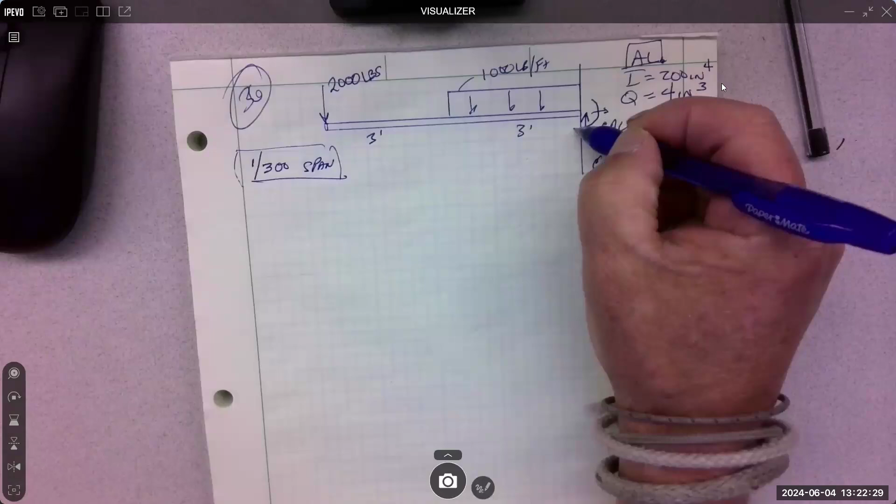And this is fixed, so it gets a Y, X, and a moment. So I'll call it moment A. We'll call this AX, and we'll call this AY. So we need a Y. We can sum forces at Y.

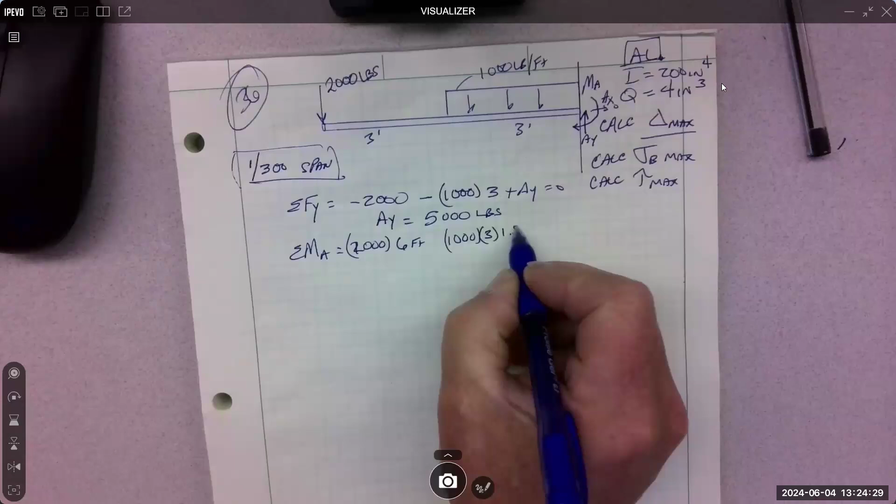2,000 times 6 feet, and that is positive. 1,000 times 3 times 1.5 - the 1,000 times 3 concentrates it halfway, 1.5. That's also plus.

And then this is going the other way, right? It's negative moment at A, and that's equal to 0. So that's how you write it with a fixed support. You label your moment, whatever you label it, and you assume the direction, and if everything comes out positive, then you're good. The direction's good, and you can calculate MA.

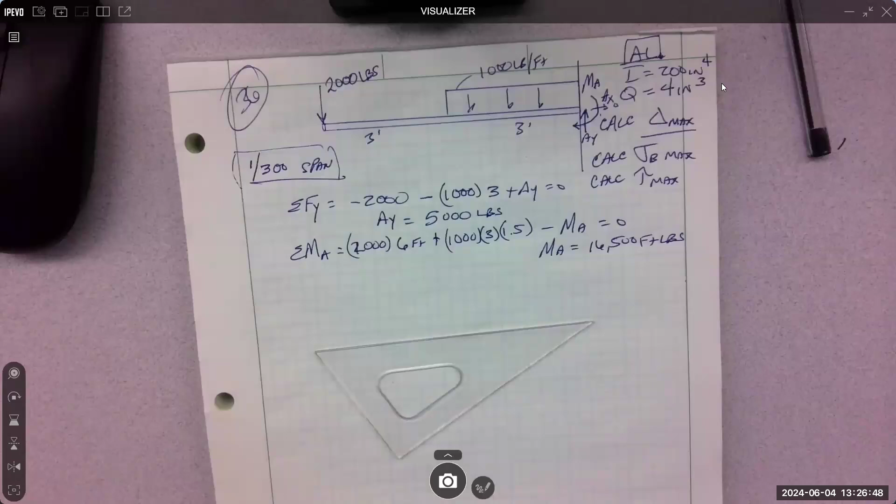Good, next Tuesday? Tuesday at 1 o'clock. If that doesn't work, let me know, because I am not following the final schedule. Don't turn me in, but the final schedule has us doing it on Thursday at 1. Would it be possible for me to take it online? You can take it at a different time if that doesn't work. So I think one might go early. I'm here at 9 on Tuesday, so you could do it at 9, or a different day. You just gotta let me know. I'll send you a message. All right, yep, yeah, no problem.

Shear diagram, you do it. You probably have it done. Rock stars.

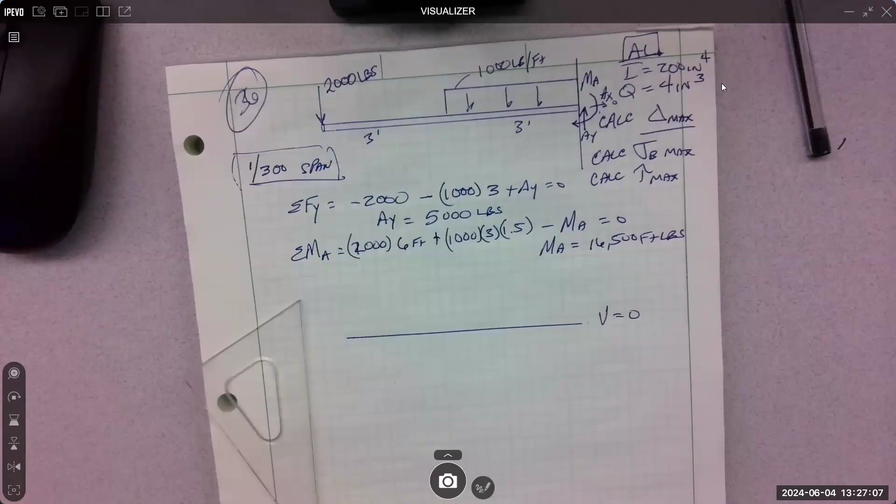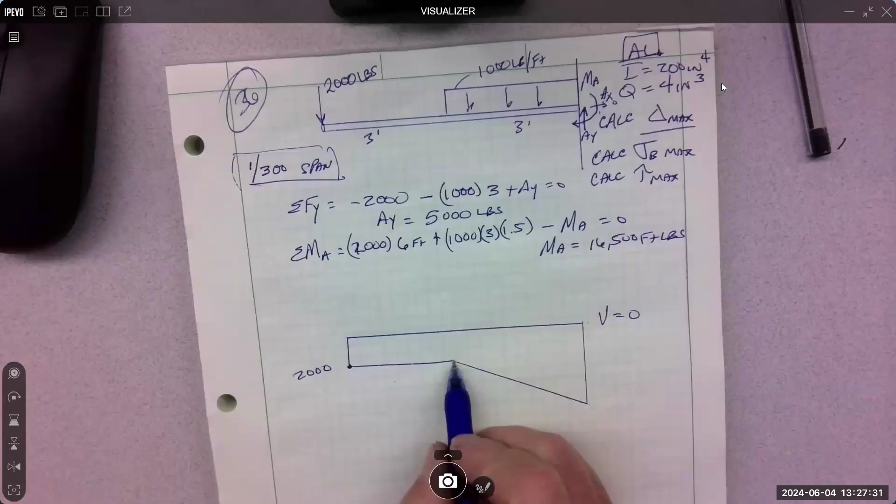It comes down, nothing happens, so it goes straight across, and then it comes down, then it goes up. This should be 2,000, and then it drops a total of 3,000 to 5,000, and then it returns. Vmax is 5,000.

Then I'm going to superimpose the moment diagram on top of the shear diagram. So it's just so fun to do that.

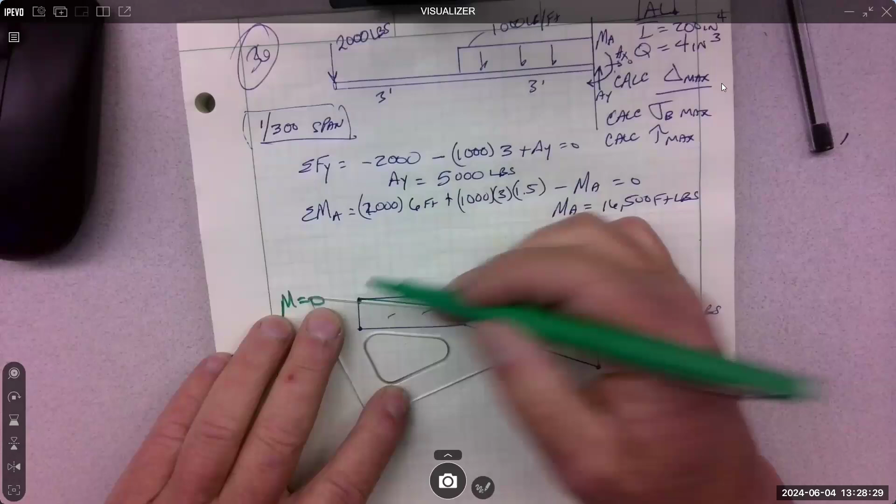So then the green equals M equals 0, and it is 0 out here, right? The shear diagram is negative, negative, negative, and then it gets more negative. So it's going to start at a slope. I'm going to keep it pretty flat to here.

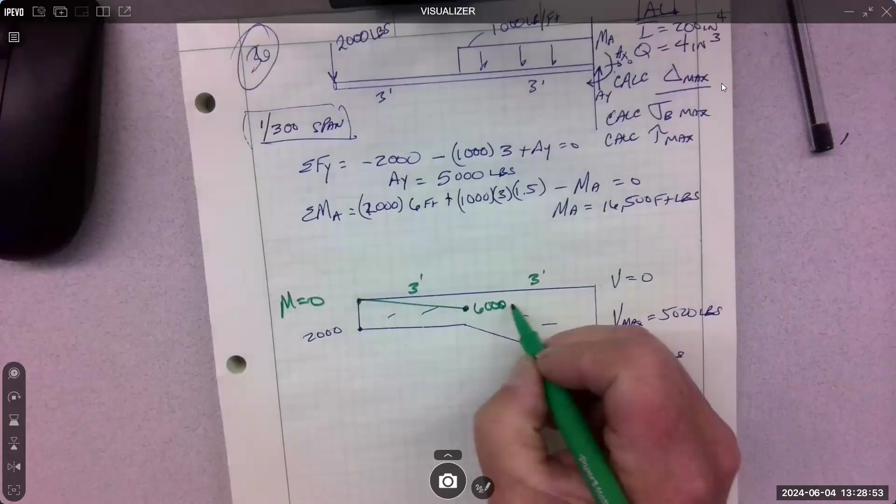And what's the moment at this location equal to? Careful. Yeah, it's just this rectangle right here, 2,000 times 3, so that is 6,000 foot-pounds. So I'm just superimposing the moment diagram on top of the shear diagram.

Then it goes more negative slope, and then it's continuously getting bigger and bigger negative. So it's coming out of here like that, and then it's getting steeper and steeper and steeper. So it is parabolic down to there.

And we know if we're confident in our moment calculation up here, that it should be 16.5, because that's the moment at this location. We're at the same location.

Sorry to interrupt, the question again - exams open up, right? Open note, open book. Thank you. Yep.

I think put an extra 0. You think what? They put an extra 0, oh I think. And then yeah, it's 2, I have a whole bunch of zeros there. Here, I'll put a decimal point in there. It's like money.

16,500 foot-pounds, good? Clearly the maximum moment. All cantilevers have - this is a cantilever, no support out here - all cantilevers have maximum moment right here. So all cantilevers, unless you have some kind of up force, they're all going to deflect like this, and that is a frowny face. So that is a negative moment. It's all down here negative, right? So there's a bunch of things that help you out with cantilevers. I guess you could have an up load and it could deflect up, but that's pretty weird, pretty rare.

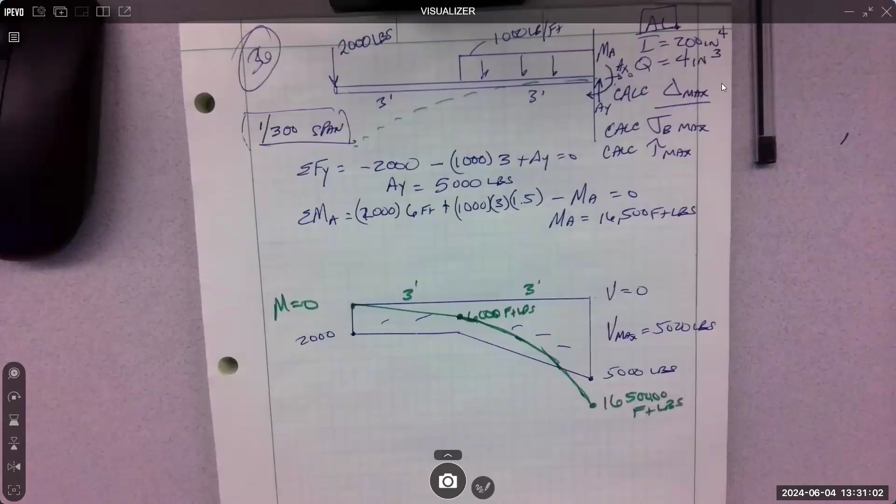All right, so now we can go for shear stress max, which is VQ over IB. And we don't know B because we don't know the shape.

So I actually just kind of threw this whole shear stress thing in. So we'll say that this thing is like some kind of a W shape, right? And here's the neutral axis, and B is the width at the neutral axis, and we'll say that that is 0.6 inches. So that's what B is. It's the width at the neutral axis, because shear stress is maximized at the neutral axis. Bending stress is maximized at the outermost fiber.

Okay, and we'll say our C value is 7 inches. We'll need that too. So I just kind of made this up. We have Q, we have I.

Yeah, I had some difficulties doing the homework from last week, trying to find the Y bar. So we were supposed to add area 1, area 2, right? The area 1 on top is the same as the box, so you just add them up.

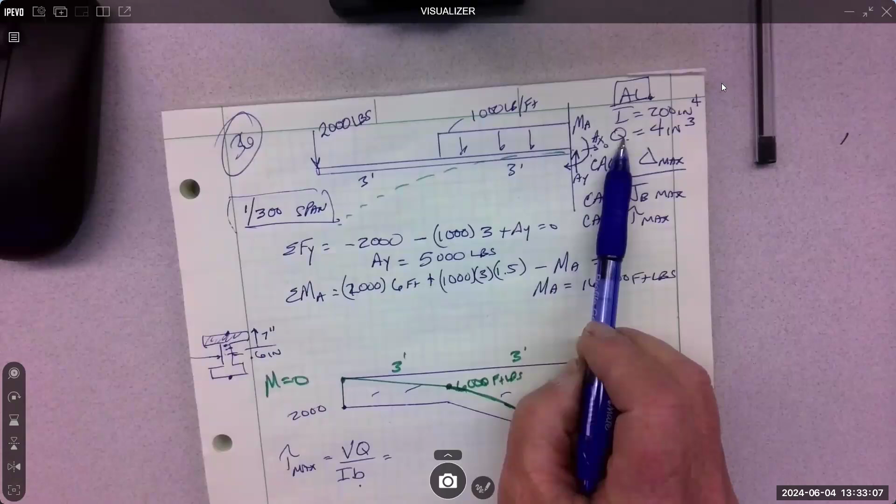So did you find the Q? The Q is given. Like in the book, or you just get it? I just made this up, yeah. Okay, and that'll happen on the final too, you're just gonna make it up. To save time, I will give you Q.

So you don't have to calculate it, right? And to save time, they've given us I. That's how I can shorten problems, by giving you all the properties, not making you look them up or calculate them. So look for that, like hey, if they're gonna give it to you, just use it, don't recalculate it. If they're gonna give you I, don't go looking it up or calculate it. If they're gonna give you Q for the shape, they're just helping you.

Alright. Maximum shear is 5,000 pounds. Q is given at 4 inches cubed. I is given at 200 inches to the 4th. And the base dimension at the neutral axis was given as 0.6.

Like, the problem can give you a lot of stuff, especially on the final. You could have the thermal coefficient of expansion for the material. You could have Poisson's ratio for the material. All these things we've dealt with in the past could show up on that problem. That doesn't mean you have to use it. Don't use it if you don't need it. Just use what you need.

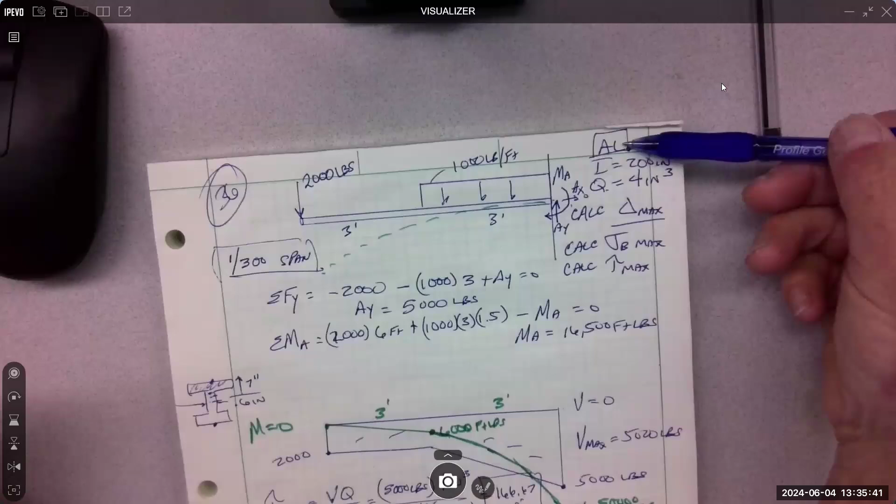And what does aluminum think of that? So you'll probably also be given the limits if there's not any in the back of the book. I don't think aluminum has any shear stress limits in the back. It doesn't, so it just has ultimate. Does it have it for aluminum? Yeah, 27 for 6061. 27,000, yeah, 27 KSI or 27,000 PSI.

That's pretty big. How much do we have? 166. So do we have a shear problem? No, we are factors of safety to the good.

Did you say do bending first on the video? Yep, bending typically you do first. Check it in shear, but you're gonna do both, so I just did this one first. If you gotta do them both, doesn't matter what order. Okay. All right, so bending is what?

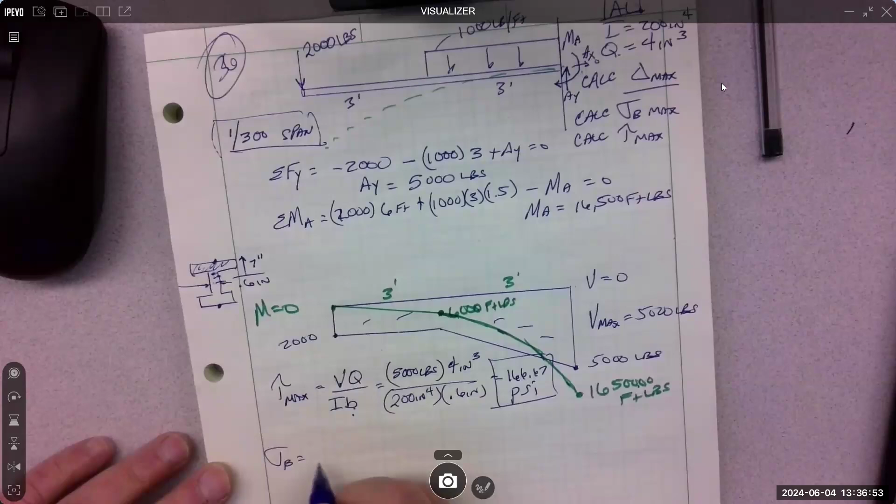Let me see. MC over I. Or M over SX if we had SX. Some of you used that. That was good, but we don't have SX. We have I, so we'll use MC over I.

What's our moment? 16,500. And that is what? Foot pounds. So again, keep track of your units. This is where the opportunity is to mess up. What's our C value? I gave it to you as 7 inches.

You get that from the shape, the C value. And then we're given I at 200 inches to the 4th. Bending stress needs to be in PSI, pounds per square inch, or KSI, kips per square inch, either one. We have pounds, but we have a foot mixed in, so that's got to go away. 12 inches per foot. Almost always the case that we have to add this to get our units to work.

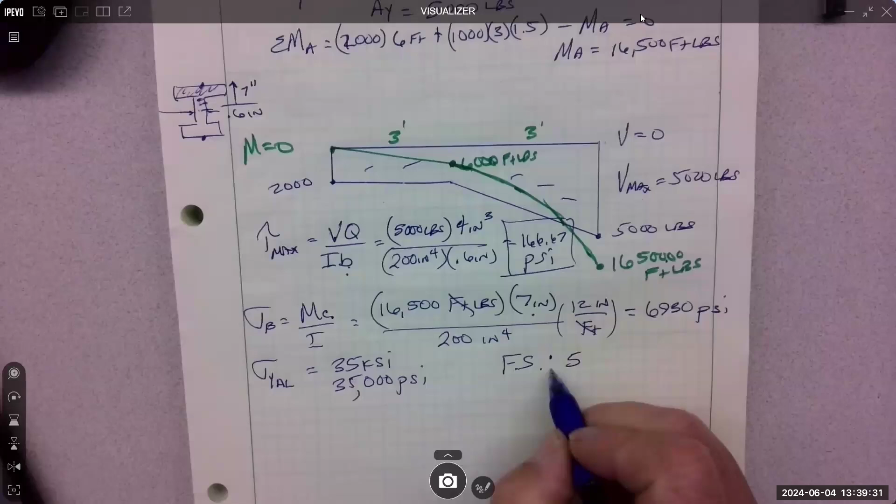All right, so everything's good. We're within stress limits, everything checks out. Now we can do deflection.

So we are doing deflection by the formula method, not the area moment method. The area moment method is pretty complicated, it's really not necessary for us to grind through. The more common method is the formula method.

There are a few in the back of the book, not all of them. You can get more of these beam diagrams online, just be careful of your source. These are called beam diagrams and formulas.

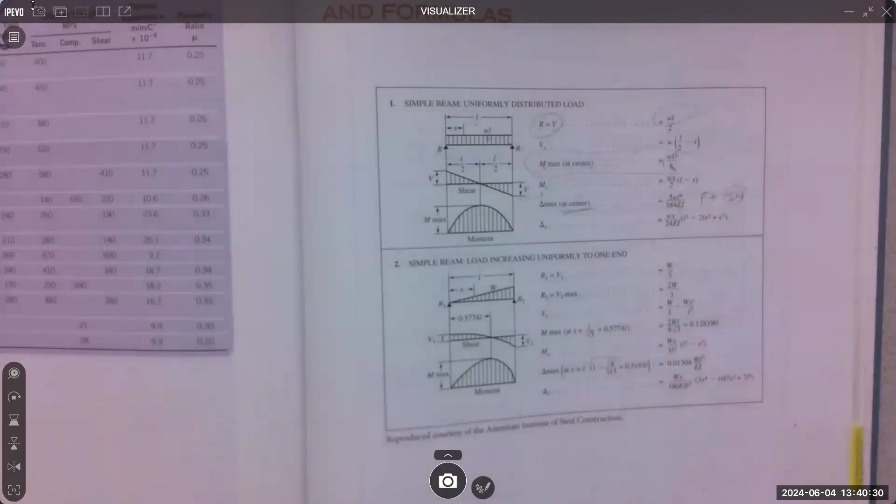In the back of the book, there are beams that are given that are super common, like we do them over and over. So they generate formulas for you. They're super handy, and you get a bunch of information from this.

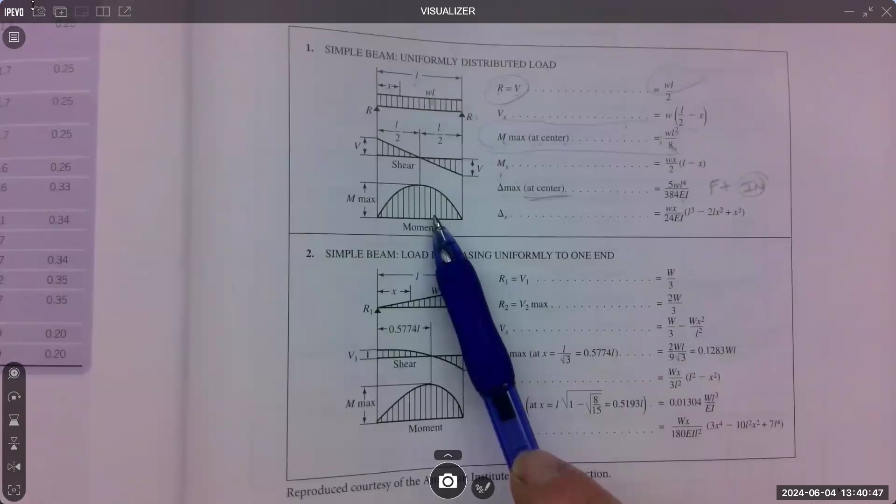You can get shear and moment diagrams. You can get maximum moment by formula. You can get moment at any X location on the beam by formula. You can get deflection, you can get deflection max. That's what that triangle is, deflection.

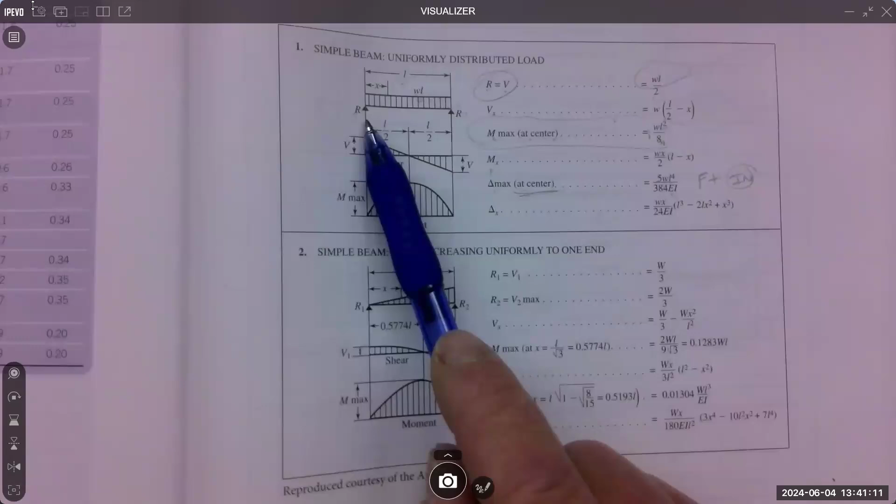This is saying that it happens to be at the center for this very simple beam. A simple beam is reaction at both ends and then a distribution, a uniform distribution. So the key is your beam has to perfectly match these beams, it cannot be any different.

So if you have a uniform load on a simple span where the supports are at the end, that's a match right there. If you have a non-uniform load, simple span where the supports are at the end, that's a match. You can also get deflection at any location X.

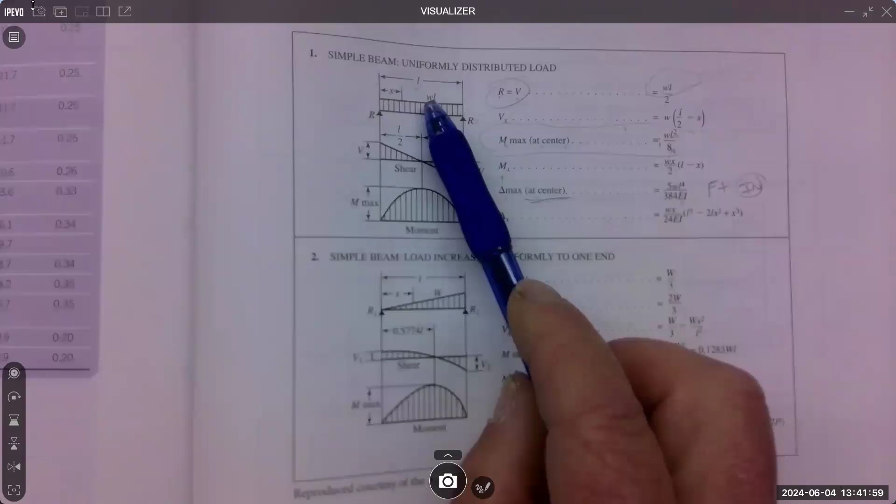Any location X, these get pretty gnarly, these equations. So W is the distribution, L is the span, so you can see L is there. You gotta look at the diagram to see what they're calling L, what they're calling X, what they're calling W.

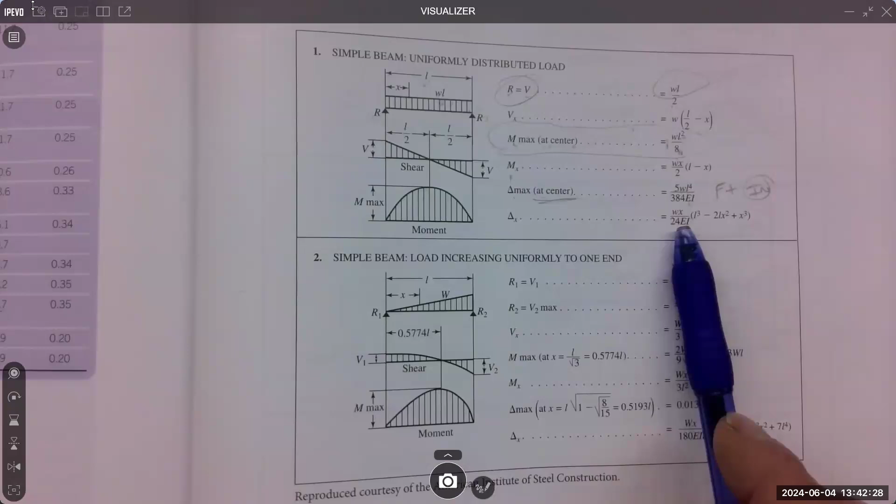And then also you're gonna need the inertia of the shape. So if it's a rectangle, you gotta know the inertia, calculate it, and you gotta know what the material is, E, modulus of elasticity. So all those things typically are given in an analysis problem where you're given everything. You're given the beam, you're given the load, you're given the conditions, and you're asked, is it good? Is it safe?

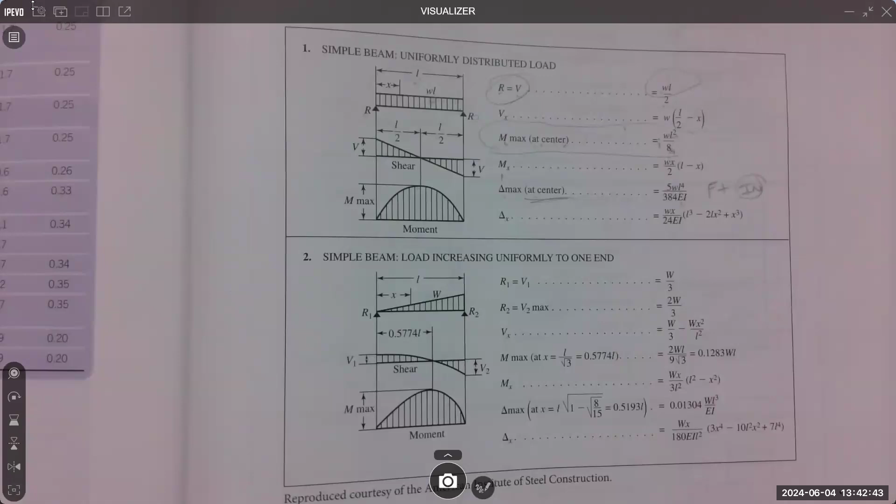So our job is to match up what we have to a beam in the back of the book if we want to use the formula method. If you can't match it up, then you can't use the formula method. Now, there is a concept called superposition.

That means if you can match up the beam to the back of the book with one of the loads, and you can match up the beam with the back of the book with a different load, and their deflection is maximized at the same location, you can use both of them and add them together.

I don't know if that made sense, but there is a cantilever with a single load at the end. Which one is it? 14? I agree, cantilever. So we can match the beam.

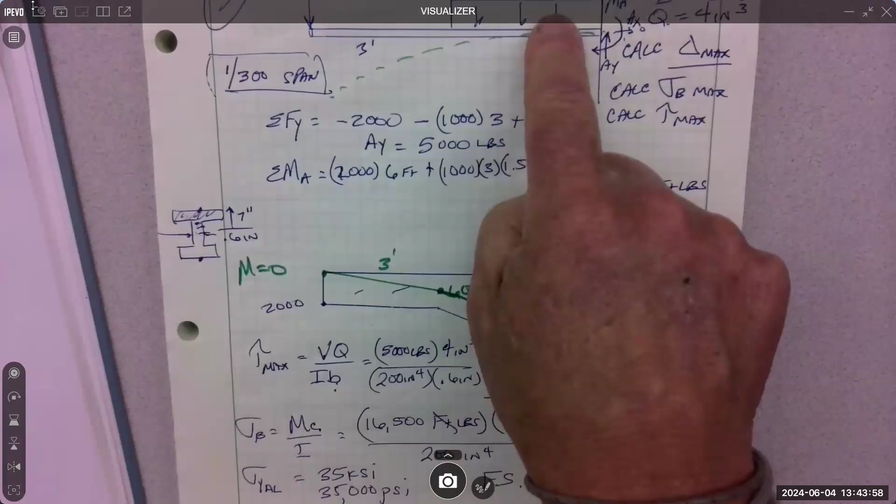We can match the beam and the load. So the beam is the same and the load, so we have a formula for this condition. Now, is there one with a partial distribution on a cantilever?

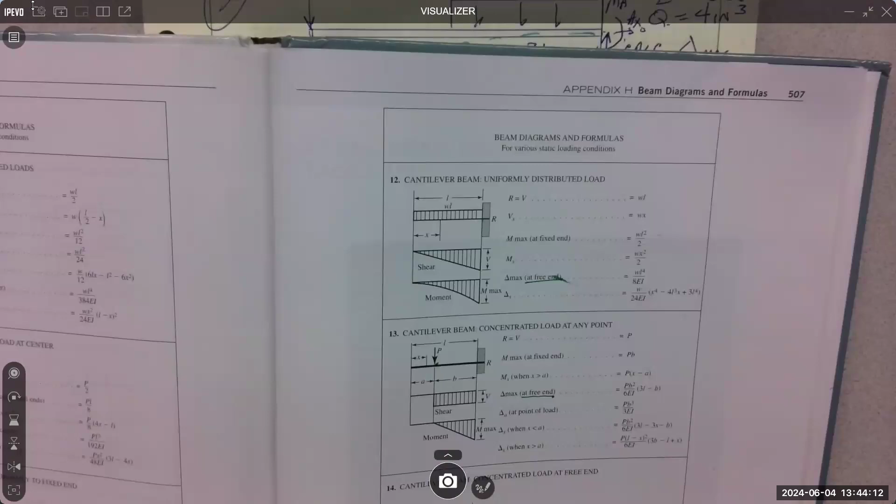12 is a full distribution, so 12 doesn't work. There is none. There is no cantilever with a partial distribution, but there is a cantilever with a concentration.

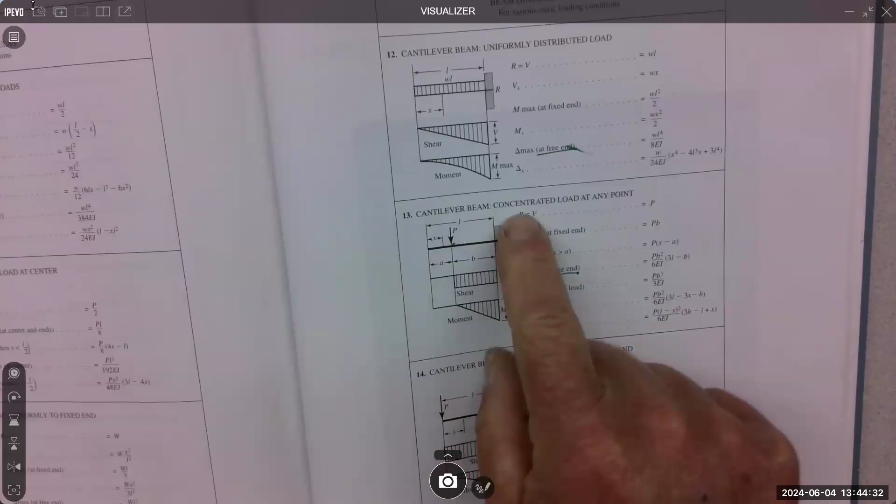Yeah, we can concentrate the distribution. Exactly, so cantilever beam concentrated load at any point. We're going to have a concentrated load at 3 feet, because we can take this distribution and concentrate it.

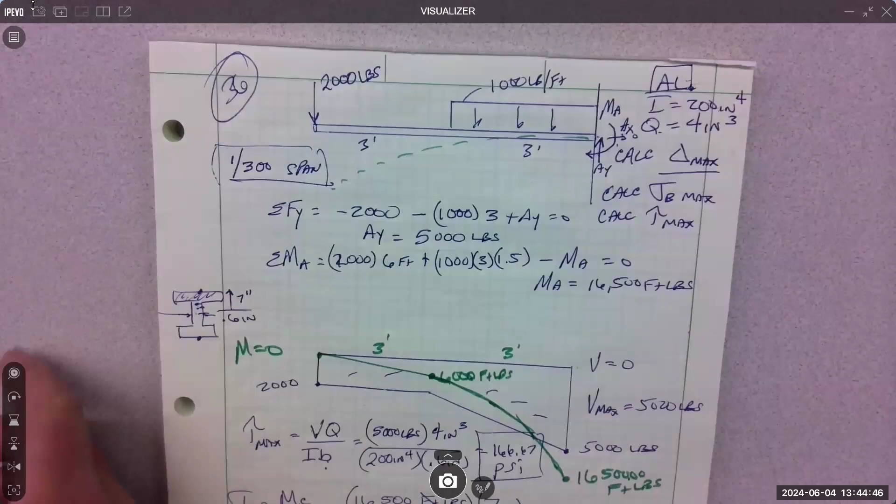Both of those deflections, so this deflection is max at the fixed end. Oh, that's the moment. At the free end, deflection maxed at the free end. Deflection maxed at the free end.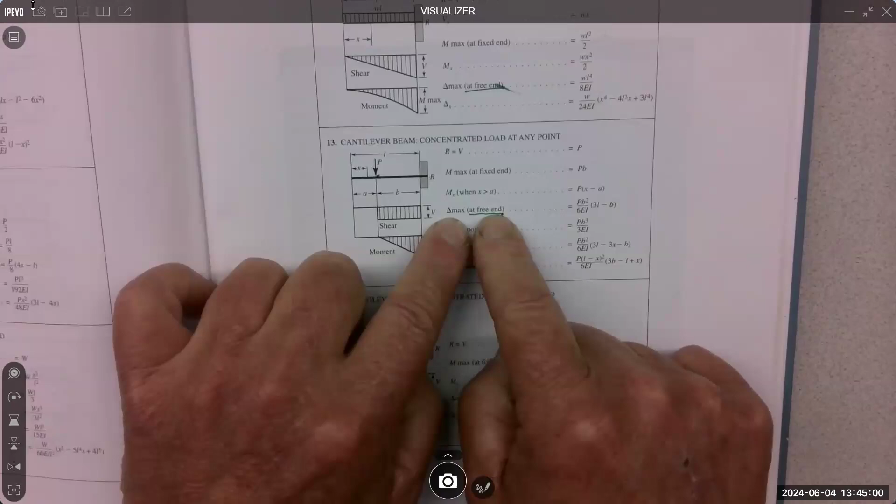That's also got to be true to use superposition, like the deflection has to be maximized at the same location. All right, so we can do this one. What's the equation?

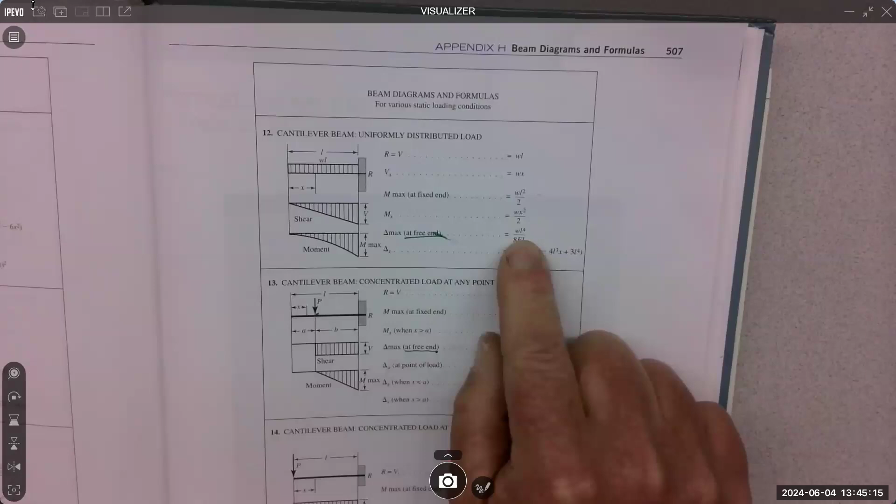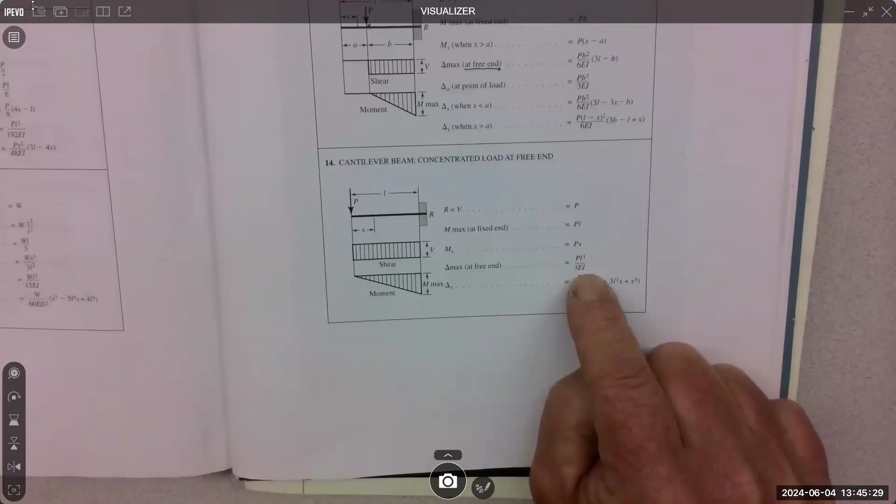Oh, this one. Where's the single one? 14? Oh, there it is. We'll do this one first. PL cubed over 3EI for maximum deflection. PL cubed over 3EI.

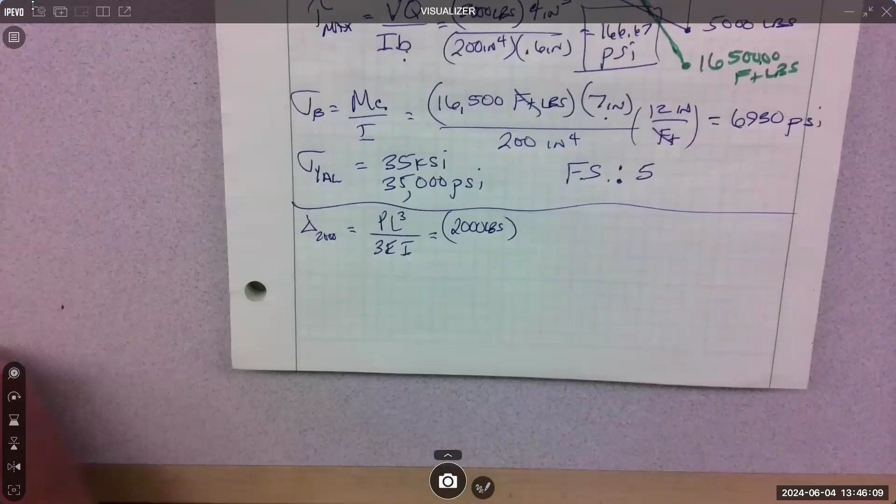So this is going to be deflection for the 2,000 pounds. It's PL cubed over 3EI. What's P? If you look at the diagram, that's the load, right? 2,000 pounds. PL to the third power over 3EI.

What's my L? Yeah, 6 feet, but E is going to be in inches squared. I is going to be inches to the 4th. So I would put L in inches. Yeah, 72 inches. That just solves that foot problem right away. Don't forget to cube it.

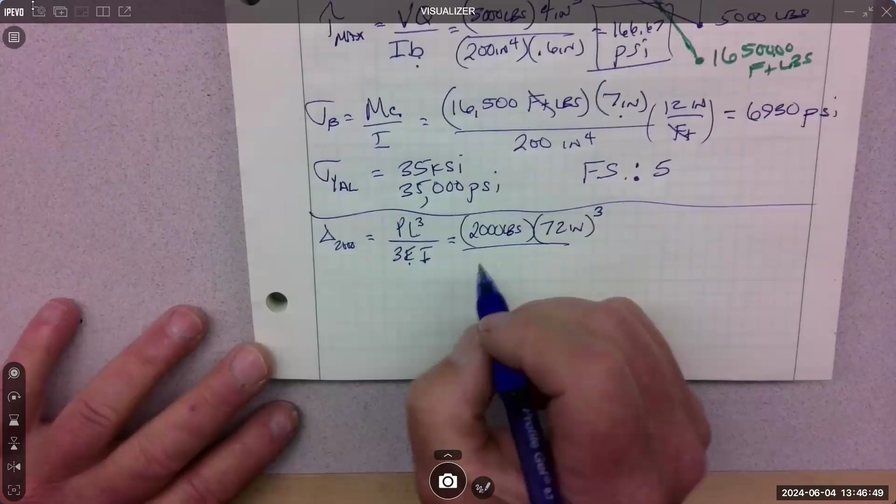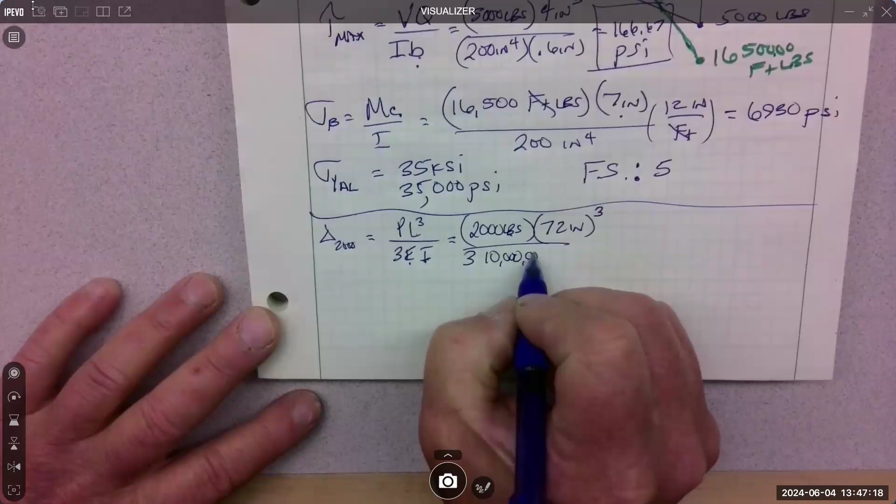3 is a constant. What's E for what material? Aluminum, yeah, whatever material you got. So what do we got for E? How much? 10,000 KSI. We have pounds above, so we want it in PSI. So it's 10 million pounds per inch squared.

Good, and then what's our I? Yeah, 200 inches to the fourth. All right, good luck running that.

That's what I get. Did anyone else get that? I did. Oh, good.

It's brackets. Yeah, it's always brackets and a TI. I just put them in. I think that's wise. I think that's a good way to do it. I would do this first. Yeah, yep.

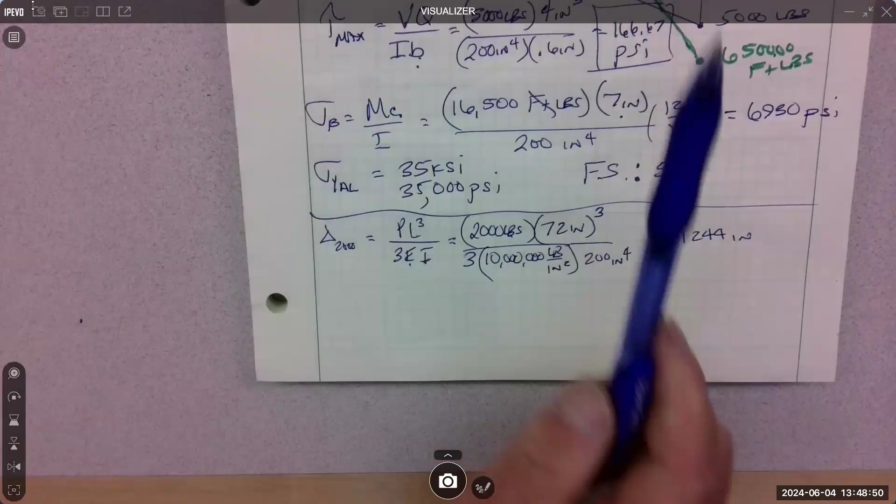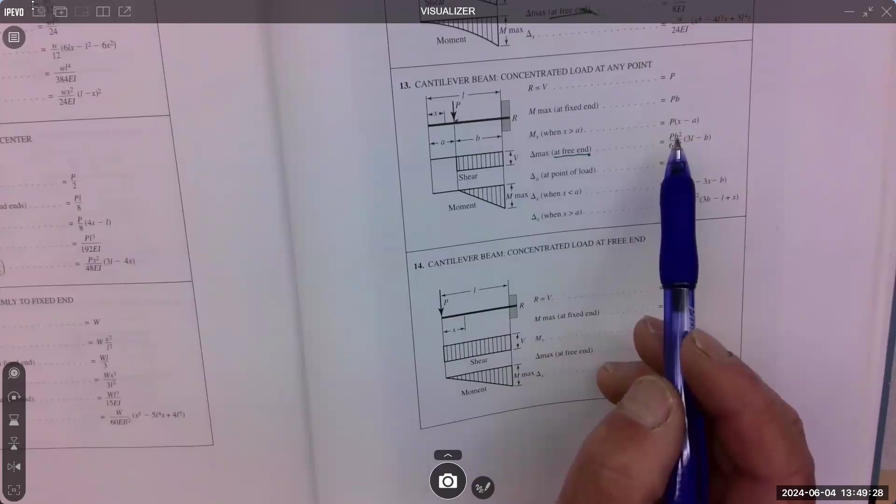All right, so the other one is this gnarly one. Concentrated load at any X location - it's that equation, max at the free end. PB squared, and it gives you B here. Over 6EI, 3L minus B. So we need this B dimension. Delta max at the free end, PB squared, over 6EI.

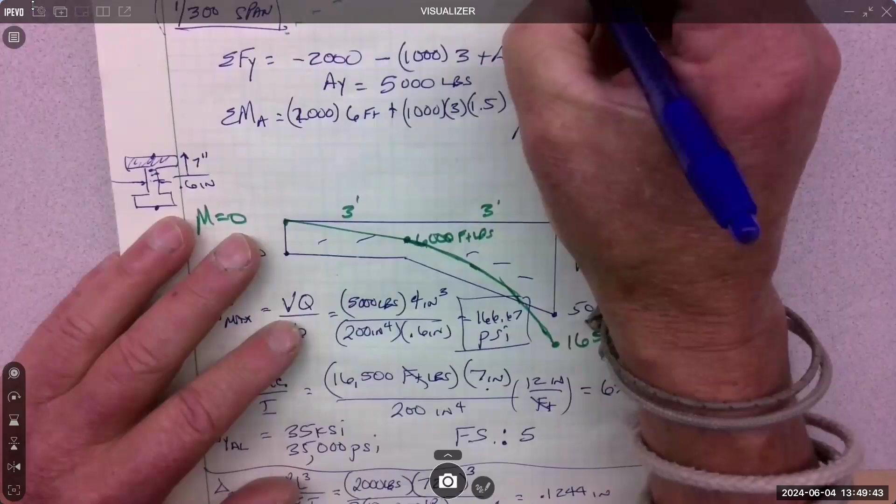Would the B be at like 1.5? Yeah, so the B is gonna be, because here's our concentration, right? And yeah, 1.5 feet. Or what, 18 inches? Oops, sorry, 1.5 feet, 18 inches. 12 plus 6.

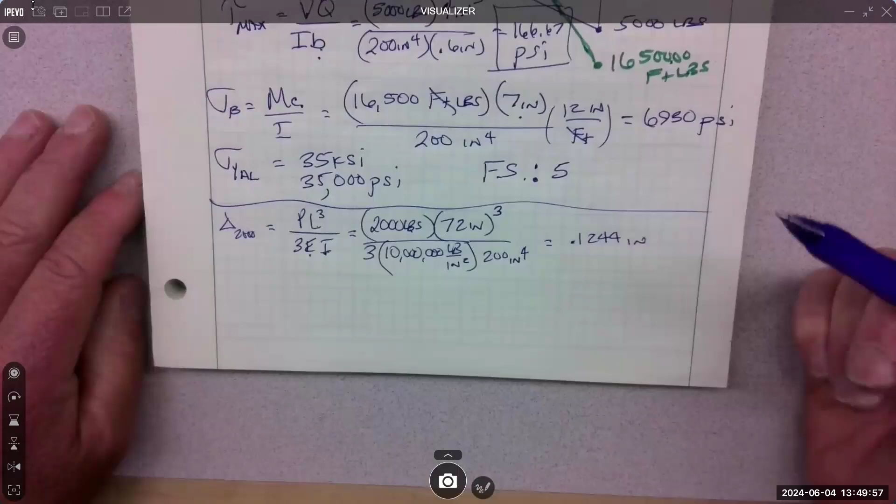All right, so now we're gonna go for, our concentration is 3,000. So I'll call the deflection 3,000. So the load is 3,000 pounds. So the B dimension is 18 inches. PB, and that is squared - don't forget to square it.

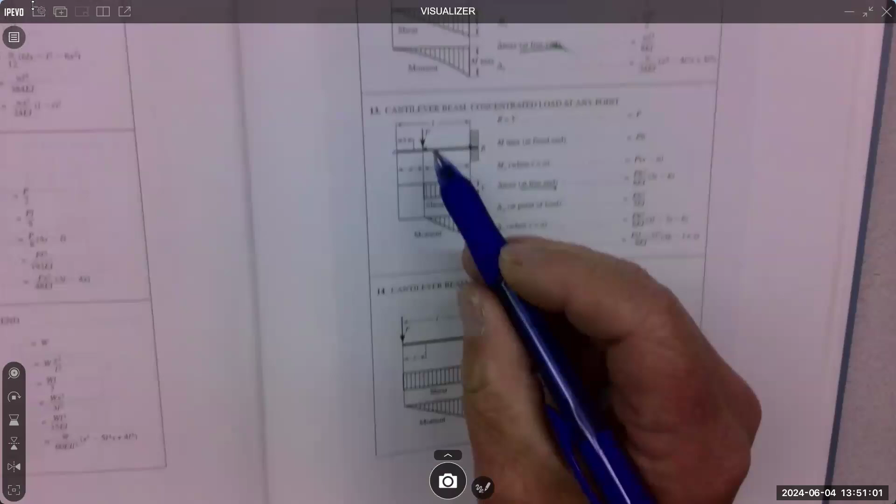Over 6EI. We know E is 10 times 10 to the 6th, and that's in PSI. And we know I is 200 inches to the 4th. Now we're going to multiply it times 3L. And look at the diagram and make sure what L is - L is the full distance. So that's 72, so 3 times 72 inches minus 18 inches. PB squared, over 6EI, 3L minus B.

Some super smart folks created these formulas for us, so we just use them. You gotta just use them. You gotta watch our units though. So we have pounds, and then down below we have pounds per inch squared. That's good, the pounds go away. We got inches to the 6th down here, inches squared up here, so we're gonna put inches to the 4th, and then that goes away. Should be good, should be back to inches.

All right, let's grind this one.

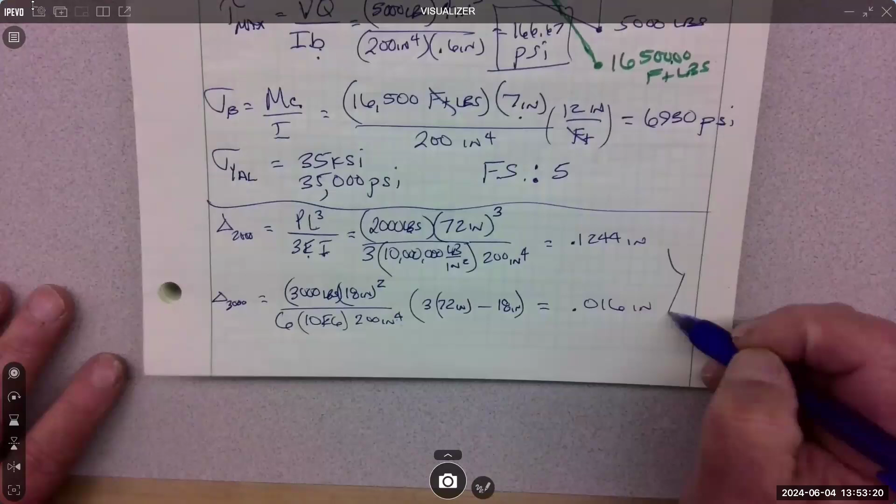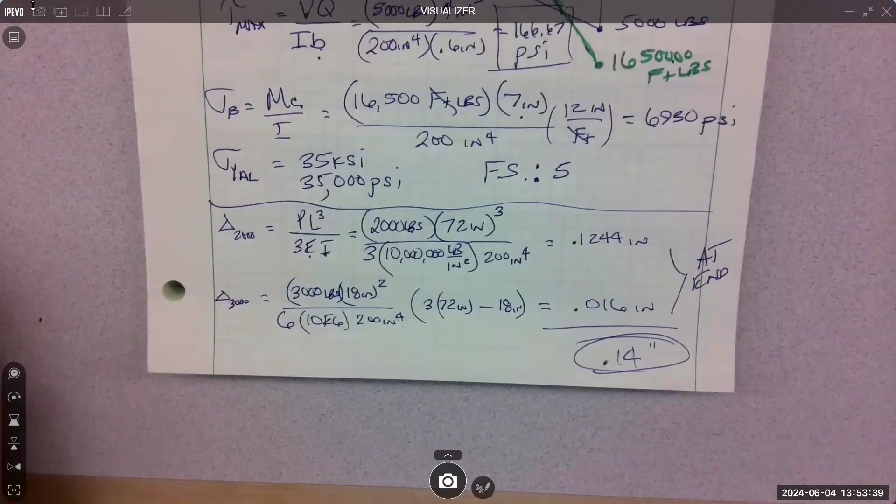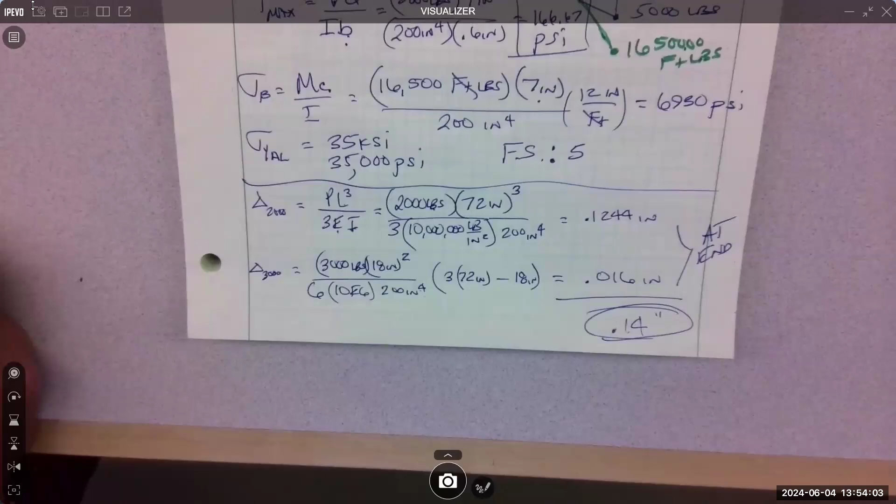And if the limit given was 1/300th of the span, that's a pretty common limit. 72, 300, divide - that was a 1/4 inch, 0.24. We're at 0.14, so we would meet that limit. I said that if our limit was this 1/300th of the span, that's kind of how they give a limit of deflection - like it can't deflect more than 1/300th of the span. The span's 72 inches, so you take 72 divided by 300 and you get 0.24.

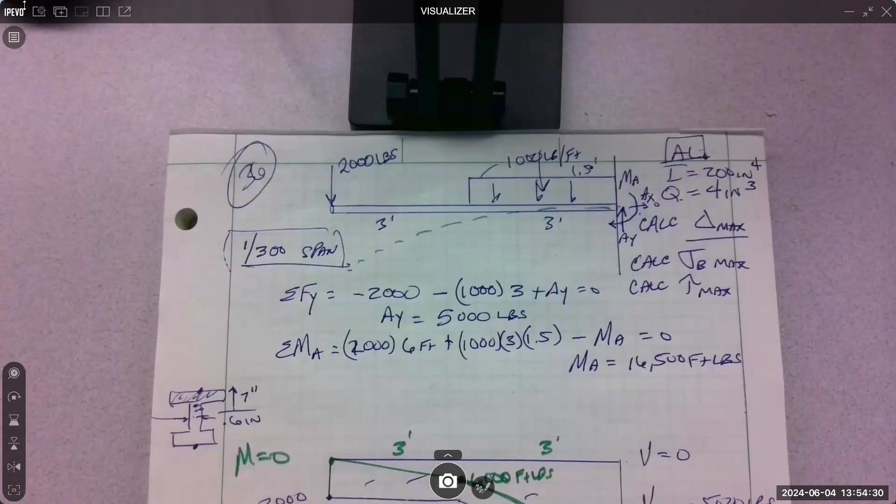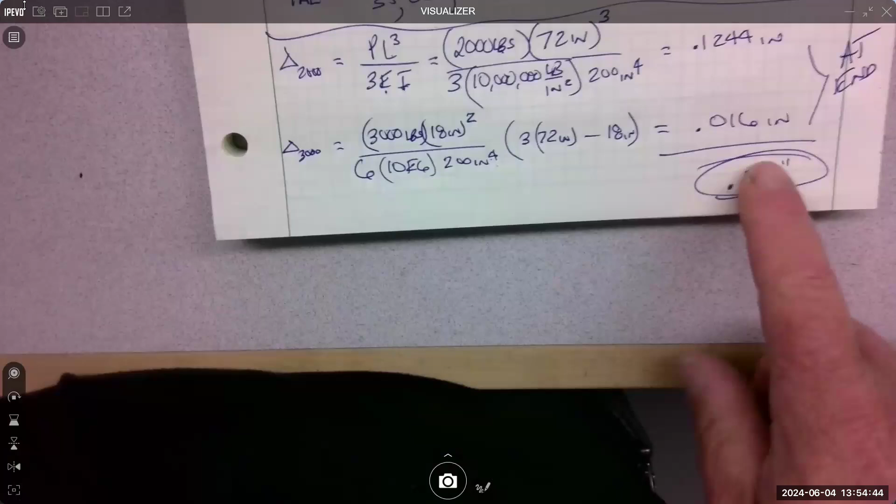Oh, and it can't be - that would be the limit. Any more than that and it's a failure. So it can fail in bending stress - it did not, not even close. It can fail in shear stress - it did not, not even close. Or it can fail in deflection - it didn't. This thing is good.

Huh? Yeah, super strong. I mean, inertia of 200 is pretty big, so that's an indicator right there that you have a lot of resistance to bending. If you have an inertia of 6, then it's like, oh, I'm not going to carry much load.

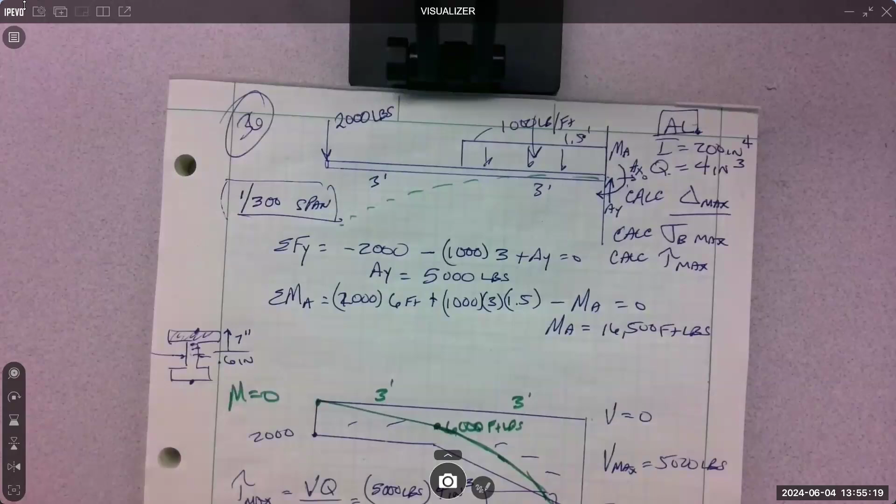All right, you have a couple homework problems in deflection to do for Thursday. Nice job. We'll do more.